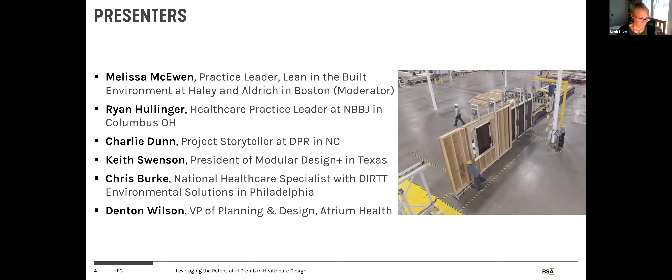There we go. Melissa, did I skip one? Melissa, we can't hear you. Thank you. It's really not good when your moderator starts the conversation on mute. So thank you, Leigh.

I'm going to be very brief because these panelists have incredible stories to share, but we all agreed that having a little bit of vocabulary at the beginning might help. There are so many terms and it's easy to get lost in the language. So just a little bit of level setting is what I'm here for. Many of these may be terms you all know, so we'll get through this really quickly. So next slide, please, Leigh.

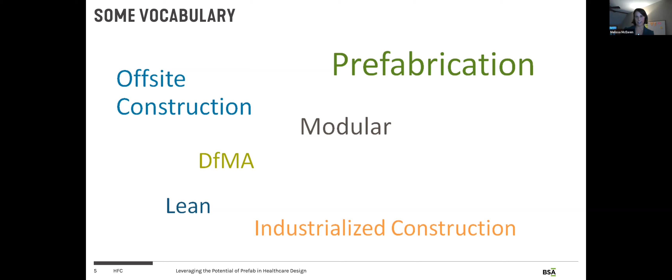There does appear there's a significant lag. There is, it's big. That's all right. So

There's sort of a spectrum of prefabrication that you'll hear about today. We'll talk a little bit and you'll hear about some single trade assemblies. This is happening a lot already. It is happening on your projects, whether you're aware it is or not in most cases. Electrical, sheet metal, plumbing, these trades have been doing this for years and are seeking to do more.

So this is electrical webs, in-wall rough, lighting assemblies, duct assemblies. This is happening off-site in people's prefabrication facilities, and it is sometimes happening on-site or in temporary spaces near sites where we're getting greater quality control, better flow. This photo happens to be a plumbing assembly from BNI, a mechanical contractor in Florida.

So next along the spectrum is multi-trade assemblies. It is just as it sounds. Elements and components from multiple trades are present. I think the MEP industry is doing amazing work here already. So multi-trade can be volumetric. So it can be box-like, think bathroom pods. It's just that it's not structural in that case.

Multi-trade can be panelized, which you will hear about today. I'm pretty sure this is a photo I took at Benson Wood up in New Hampshire. And multi-trade are things like risers, racks, skids. The photo on the right is a racking system from BNI.

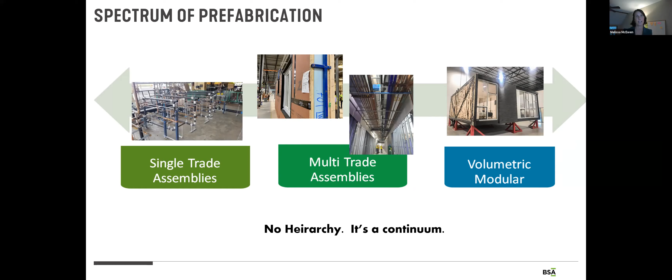So this last term that's out there, I think is a little bit more all-encompassing, and I think the lean evangelist in me really likes this term. I believe this was coined by Amy Marks. If not, she's made it heavily popular in the past year at Autodesk. So most simply, industrialized construction is about bringing the mindset and techniques of manufacturing to the built environment. So the fabrication continuum isn't so much the focus here.

It's the goals that matter, streamlining design, streamlining our building processes, removing waste, confusion, improving flow, and most importantly, actually finding ways to deliver the value our customers seek better, and being more satisfied in our own work. There's nothing like a brutal process to just drag you down every day.

So to really optimize this potential, there are a lot of enablers needed, and I think you'll hear so many of these in the presentations today. As we move along this shift and make this shift, there are behavioral enablers. The whole ecosystem of players need to change: owners, designers, CMs, trades, all the way through how we engage our supply chain. I think lean thinking is a critical element of enabling these behaviors. You'll hear about accountability and collaboration from Denton, trust, early decision making.

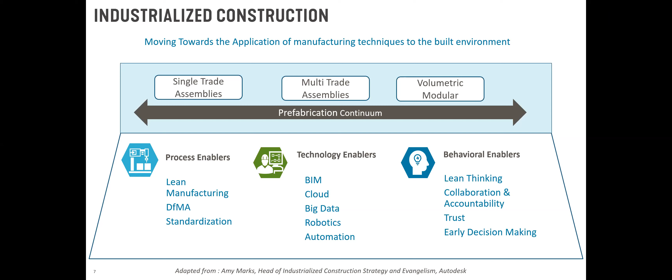There are technology enablers, so leveraging the immense and rapidly changing power of technology to make things easier and faster and better, and to allow the designers to work differently. And then process enablers. So you'll notice here I'm focusing on lean manufacturing, not so much construction. So really bringing in the concepts of flow and standardization and automation.

I've also included, and I think you'll hear today about the concept of DFMA, design for manufacture and assembly. I think the simplest way to think about this is just design for ease of manufacture of parts, ease of assembly. I prefer the term DFX, because it should be ease of anything. It could be ease of install or even ease of disassembly in our age of flexibility and reuse.

Good. So I was going to give an overview of the way we thought about prefabrication at NBBJ. And essentially, it's going to be looking forward and back. First, we start off by looking back. We're going back 12 years to the first project we did in a multi-trade prefabrication mode. That was Miami Valley Hospital.

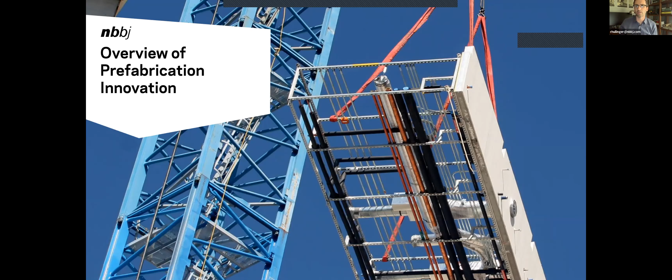Then we're going to move forward to the present. And then we're going to even think about where prefabrication is headed next, maybe 12 years in the future. I'm going to go through a lot of slides really quickly, but essentially, the big idea here is that we're not doing prefabrication for prefabrication's sake, but we just see with our healthcare clients this immense desire for standardization.

And over time, the desire for standardization across healthcare systems and all of the value that that brings in terms of operations and brand and experience, that is extreme. What we're also seeing then parallel to that in construction is a desire for prefabrication and all the value that that brings to the way the industry works.

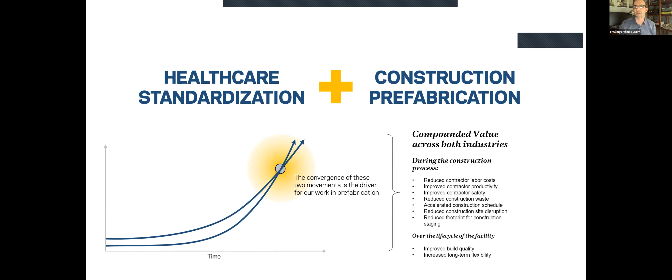So what we're doing is an overlay of those two curves, and we're looking for that sweet spot in the middle, and that's why we're interested in prefabrication, because it's the intersection of these two trends, two different industries that come together and bring value in terms of the way the building is constructed and the way it works in the future. So this started with Miami Valley Hospital.

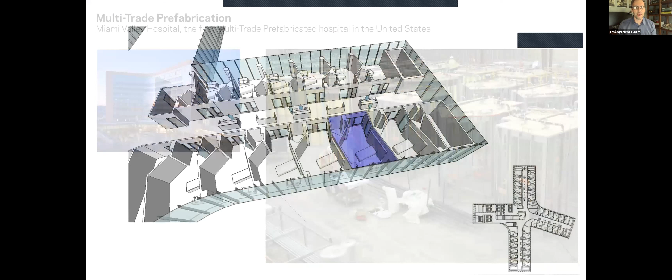Building Design and Construction called this the first multi-trade prefabricated project in the United States. Those were basically an assembly of 180 acuity adaptable rooms. And with that, we had all identical rooms spread across multiple floors and identical wings. The idea at first was to think volumetrically about it, but then the real breakthrough was a kind of hybrid between volumetric and panelized that thought of the demising wall and that componentry as something that could be repeated 180 times. So that's exactly what we did.

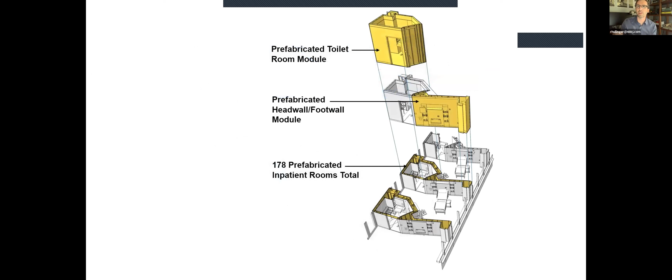We thought about building these kind of pork chop components in a factory and loading 4 of them onto a truck. In terms of the way they were going to be delivered and even picked or elevated up, we ended up splitting them into 2 pieces, the toilet room module and the head wall footwall module. But essentially that was all built in rented warehouse space, a batch plant approach with the same CM that was working on site, working off site in this case.

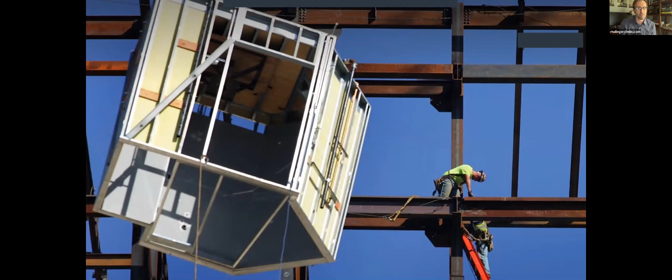And then here's a picture of these; they were pretty primitive. Again, this was 12 years ago that these were built, but the first of the toilet room modules, it was loaded up into this space. What was really important to us was the craft and quality. It didn't feel like you were walking into a prefabricated space.

And frankly, at the time, as we surveyed the landscape of providers who were doing prefabrication, we weren't seeing work that was at this level, which is why we did the batch plant approach. But that's certainly something that's changed for the better over time. And we're seeing great precision from dedicated prefabricators as well who are using an assembly line.

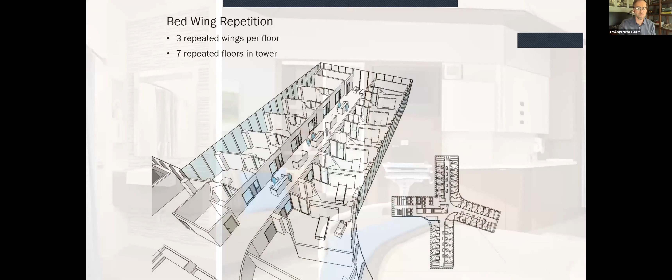Also for this project, we used the first in the country for MEP racks. So you see that arrayed across each of these wings. This was a very early BIM model back when we were using Bentley actually, but thinking about all the systems that are in between the floor and the ceiling, and then how those could be rack based.

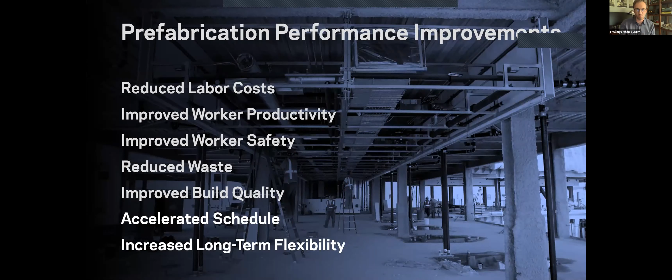In this case, it's an open core module, so it's a 16-foot wide center space that runs down the middle of each wing. That meant we could do 20 foot long by 8 foot modules for each of the racks. And those were built in the same rented warehouse space. You see all of that construction here. The metrics around that were pretty exciting in terms of the way it all came together: reduced labor cost, increased productivity, improved safety, reduced waste, build quality, much faster, and then improved long-term flexibility.

And just to touch on a few of those metrics, on a conventional job site, a plumber's installation quota is at 200 feet per day. And the plumbers in this shop were doing 600 feet per day for that 300% productivity increase.

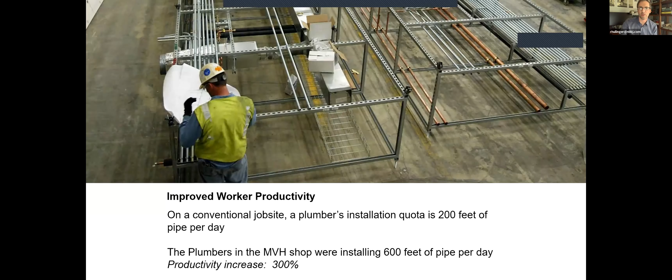Or another really important value that was brought to this was improved build quality. The inspectors were brought into that space and they could inspect all of the work 360 degrees; they weren't coming in and looking at things that were already hidden. And they really appreciated that. Plus things could be capped in the shop, which meant they were cleaner.

And then lastly, in terms of adaptability and serviceability, we designed in, and we always continue to design into these racks, a no-fly zone. And that basically gives the owner the opportunity to get up into that ceiling, access things, or even load new systems into that rack, systems that haven't been invented yet, but are going to become important in the next 10, 20, 30 years.

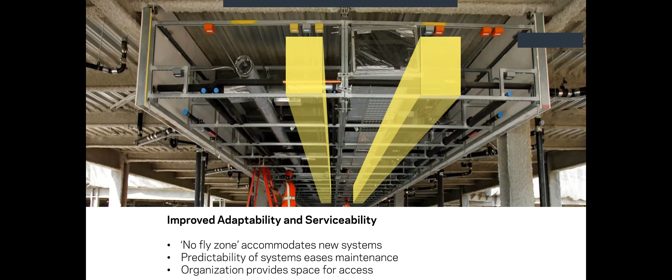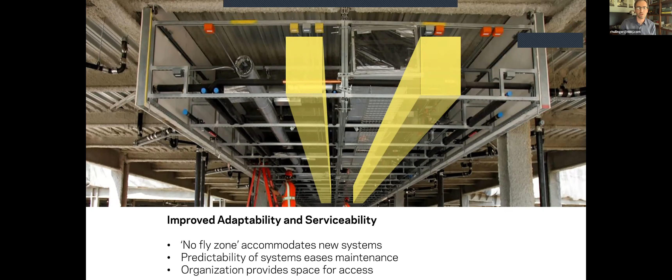So we're really seeing then prefabrication, not just as a game changer in terms of delivering the building on day one, but providing a better flexible and adaptable environment over time, and then really working against premature obsolescence. And one last story on Miami Valley, because we had adopted this prefabrication mindset, totally different direction on this, not thinking about the rooms or the racks, but even the whole construction sequence.

Unfortunately, the temporary bridge had to be quite robust, right? You were moving critical care patients through it. So it could not wobble, HVAC to the max. And it was pricing out at $2 million to stick build that. So we asked, well, now that we have a prefabrication mindset, is there a way to do that bridge in a prefabricated way? And so we had the idea of talking to a jetway manufacturer.

So we talked to the FMC jetway company. They said they would be very interested and they would provide their product. And instead of it taking 6 months to build, they could use things they already had in hand, and it could be delivered much more rapidly to the site.

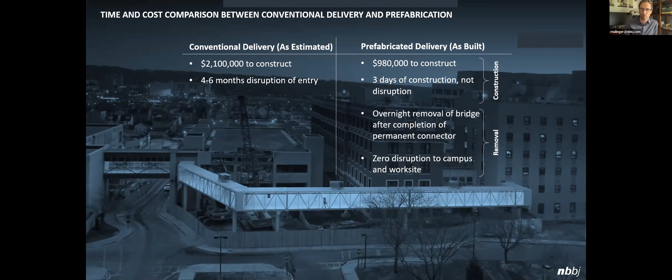And interestingly then, you compare the metrics, $2 million as estimated to construct the temporary bridge conventionally, half that cost to do it with prefabrication. It would have taken 4 to 6 months to do it conventionally. They actually installed this in 3 days, and they were able to remove it overnight when the new permanent bridge was in place because of the new construction.

Since Miami Valley in 2010, we've done a series of other projects, and you can see in this slide the way the scope has increased for each. And then one very exciting aspect of the scope increase in what we're calling Generation 3 is that we added renovation, which then minimizes disruption, because instead of shutting down a bed floor in order to do demolition and then build everything by hand inside, you can build everything before you even shut it down and really minimize the downtime for that floor.

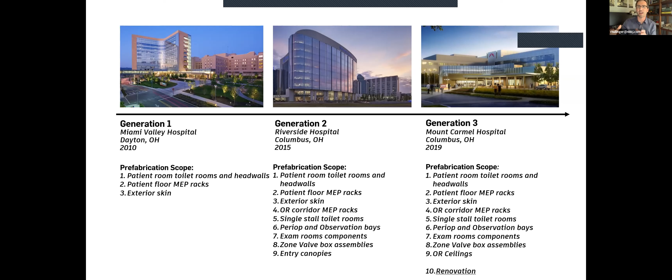The next project we wanted to talk about, really Generation 4, was Atrium. And I know that other folks down the line are going to talk more about this project, but I did want to talk about how we kind of set the table for Atrium and talked about some of the interesting advances there. And with that, we really zoomed in on the opportunity with that head wall. And thinking about the prefabricated head wall that we've been doing on multiple projects in the past, we moved forward with this idea of a smart chassis.

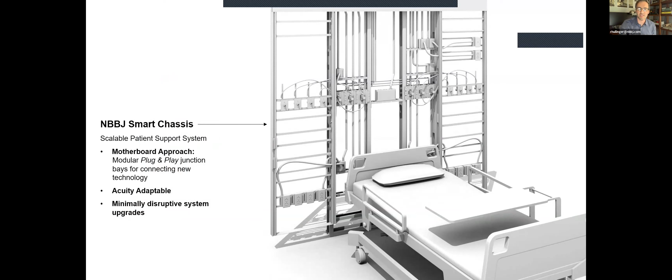And if you peel away the cladding on that head wall, then what you're getting is a motherboard approach. And so that's showing something that works well for acuity adaptability. It can accommodate systems, again, just like the overhead racks, that haven't even been invented yet. And it does it in a minimally disruptive way.

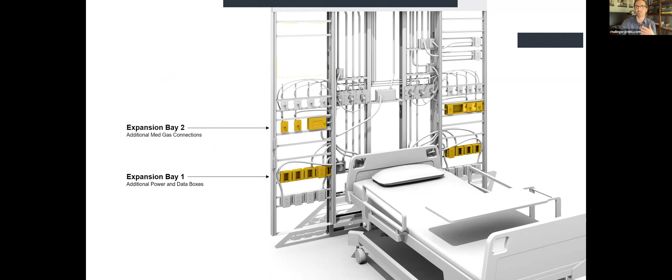So we've got a little bit of a build here that gets into like expansion bay 1 for additional power and data, expansion bay 2 for new med gases, expansion bay 3, what's down the line, an AI server, or new human interface control systems, or even expansion bay 5, which could be robotics that are built into the system. But we're thinking again about how to remove premature obsolescence and adapt for the future. And this prefabricated head wall is a great opportunity to do that.

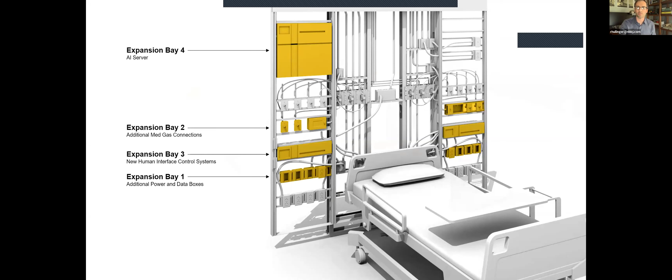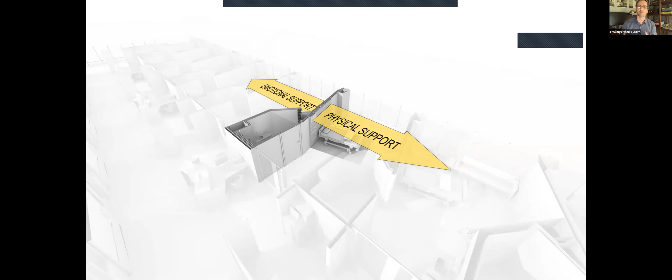And essentially then what you get are two vectors of support that come out of that chassis in the center. You have physical support, life support for the patient when it's on the headwall face, and then emotional support for the patient and family when it's on the foot wall face.

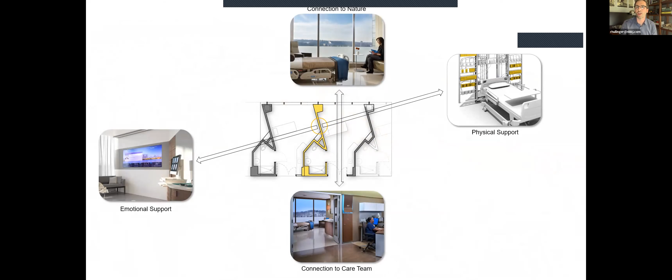Or essentially here, connection to nature up, connection to the care team down, emotional support on one side and physical support on the other, all spinning off of this prefabricated component in the center.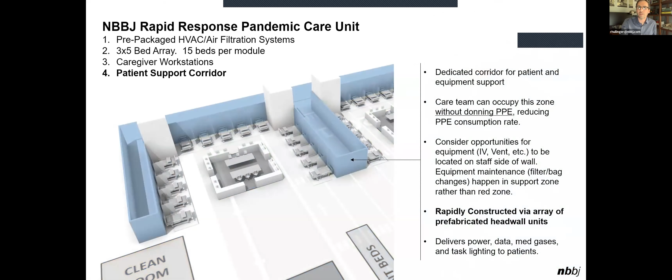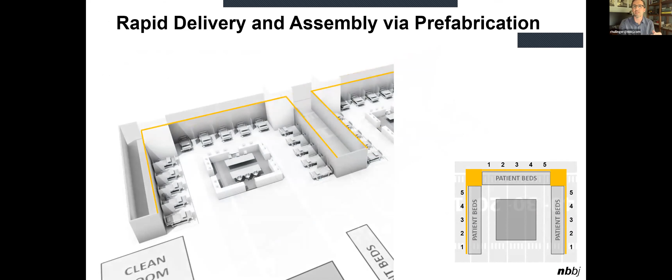We also move forward with this idea, and now this is actually thinking about the present, work that we've done for the Army Corps of Engineers. They began working with this idea of how to do surge beds on an arena field. And so we took their layout and asked, well, how could prefabrication, especially the headwall technology that we've been developing, be tied into that? And so you see here a series of units that then form the ring around the patient care space in the center.

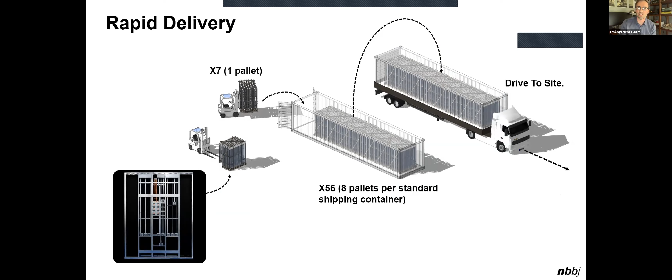It's the same company that we're working with for the prefabrication of the head walls. And again, the idea that you could put these in a truck, move them to any hotspot in the country. And when we developed this in the spring, it was definitely focused on the Northeast. Now they're beginning to do field hospital work in Wisconsin. So we'll actually see where this might go. And again, they could be reused or stockpiled, so everything can be sterilized if a pandemic materializes, and then actually be loaded into new construction once that takes place.

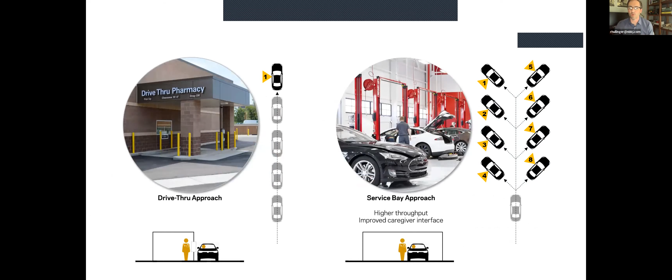And then the last thing we'll talk about is this in-car care unit. This is probably moving a few years into the future, but prefabrication also comes into play in that. And essentially we've said, with COVID, what are the next ways we can think about the safety and convenience of the car as a potential site for primary care? We thought originally about a drive-through approach, and then we've advanced that to what we're calling the service bay approach. It's parallel processing and better provider to patient interface through the car window. Here's a way that we have those.

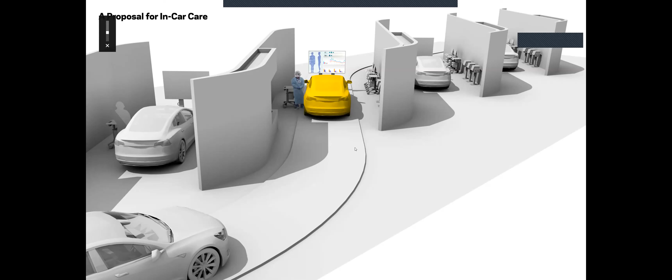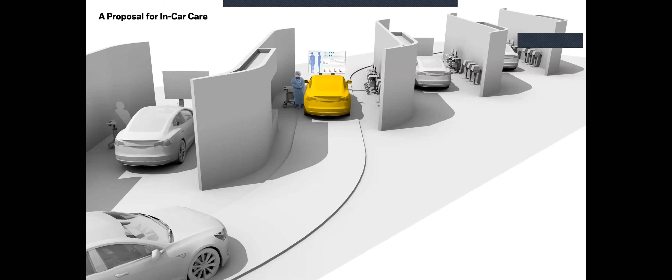Excuse me, we need one more person to mute. And now, Ryan, we've lost you. Hey guys. Okay, good, you're back. Great. Yeah, but I do hear an echo. Hello? We can hear you. Okay. Good. You guys don't hear the echo though? I hear a little echo. You do hear the echo, Ryan, yes. Maybe someone else can try muting. And I am patrolling for muting others, so if I mute you, that's why. Anyone else? Ryan, do you still have your cell phone on? Nope. Okay. Well, I can keep going. I'll just plow through the echo. Melissa, I've lost my host capacity, so I'll let you do the muting. Okay. Are you good, Ryan? You want to keep going? So we're not echoing, just Ryan's echoing. And now we don't hear him at all. And now, Ryan, we don't hear you again. Much better. You're back to normal. Beautiful. Okay, great. Not sure what the glitch was, but let's keep going.

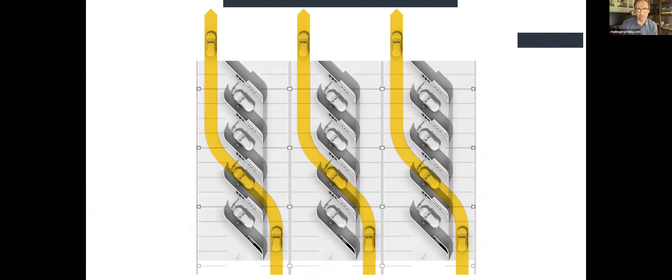Great. Okay, so I'll just wrap up by finishing this section on what car care might look like in the future, and again, the prefabrication option for that. So essentially here you see the idea of prefabricated bays, and a patient can just pull in and care is delivered right through the side of the car. And the case carts or whatever you need can then be brought to that patient. We laid this all out on a 60-foot grid, and the idea is that it works on an existing parking lot or even within an existing parking deck.

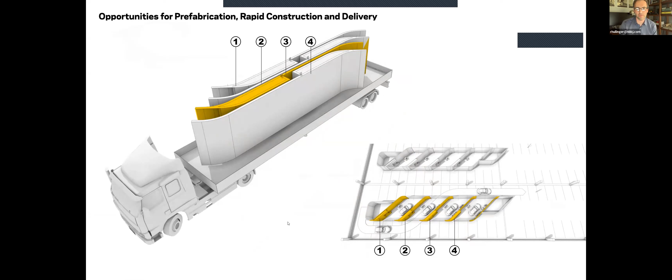And essentially then you see those blades with all of the infrastructure built in right away that are loaded on the flatbed, and then a roofing system as well for when this is done on a surface lot or the top of a garage, potentially incorporating solar too for charging of a car inside or the equipment. So then we just wrap up with a couple of images of that.

But a really quick overview then of where we've been and where we're going, and the mindset then is stitching all those things together. And we're really looking for healthcare specific opportunities and thinking, of course, about prefabrication, not just as a better way of building, but a way of making sure that the work is more enduring and adaptable for a very uncertain future in healthcare. Thank you.

Thank you, Ryan. Yes, thank you very much. If you can give control back to Lee, and Charlie, if you want to unmute yourself. Lee, have you lost the ability to share? Do I need to share? Okay. I'm good, just making sure. It's just slow. It's a big file. All right, Charlie. Okay, great.

Thanks. So a little bit about DPR. We're a technical builder. We want to be experts. We want to be builders and not brokers. And we have 5 subsidiaries that are all involved in prefabrication and modular. SurePods you'll hear a little bit about, which is volumetric. Digital building components, so true digital with robotic process automation. Robotic welding, EIG for electrical modules, OES for prefab, and equipment assist for prefab as a rental fleet. And then VueOps, where we really are working hard to understand the building lifecycle and be able to feed back both design and construction data from lifecycle data. So we stop this cycle of continuing to make the same mistakes in industries. So the next slide, please.

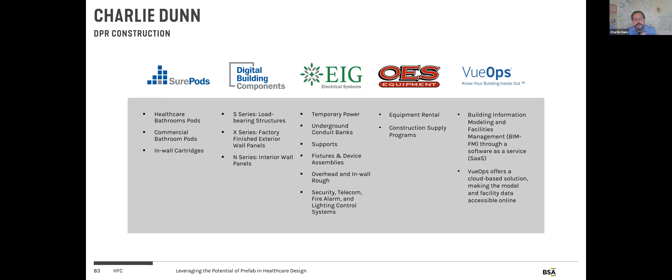I come to this guy often, and to answer the question, why would I say we want prefab as a GC, I would come to one word: productivity. And to me, and I'll get to this in a couple of these levers that I'll discuss, productivity encompasses more than just value of work in place. As we understand it better, particularly learning from manufacturing, it encompasses information flow, safety, quality, and a host of other variables. So to me, I sum up that prefab gives us an opportunity to solve this productivity dilemma we find ourselves in as an industry.

So Archimedes made this statement: give me a place to stand and I shall move the world. So we go to the next slide, and I'll couch my conversation here briefly in 3 different levers. So the first lever is this: change the presumption. As we pursued this work for Atrium, we built upon some things other teams had done, and you see this A3 and the call out at the bottom. Everything is prefabricated until it is proven otherwise. So rather than proving we should prefabricate, now we've shifted the presumption to prove that we should not prefabricate.

Go to the next slide and look at lever number 2. And this is why I think we need to change this presumption. We're still learning what is a mature model for prefab value. How do we define and measure all of these benefits? This I've borrowed from Bryden Wood. We're working on our own version of this. It involves multi-criteria decision-making, which, as we know, we struggle with as a people. And then also what we value today may not be the long-term value. We're just at the early stages of this in general construction. EPC world has been a little bit farther out ahead of us.

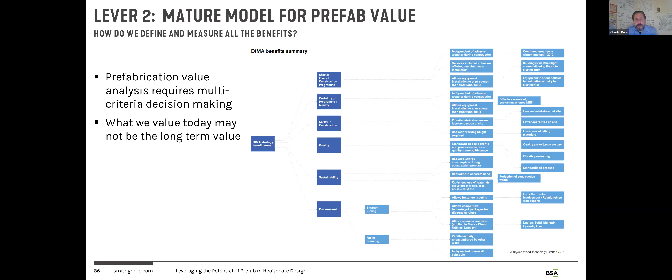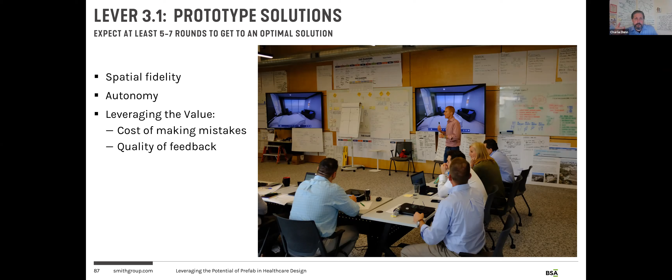So next slide. And now we get into the levers I get more tangibly excited about with this project. Lever 3.1, prototype our solutions. And understanding that prototyping will require at least 5 to 7 rounds to get an optimal solution. And here specifically, as we worked with NBBJ, I'm not going to steal Denton's thunder, as we worked in a phenomenal team building opportunity before being awarded, we learned a couple of things I wanted to share that I think would be of benefit to architects and designers. We learned the importance of spatial fidelity and the importance of autonomy on the part of the individual where you're requesting feedback.

Then we go to VR and AR. Here, there's a little bit higher cost, but not bad. And there's a little bit better quality. Spatial, I'm going to come back to. We go to functional. That's where we build it in the field. Perhaps not connected and powered, but it's functionally accurate. There, our cost goes way up. We've mobilized, we've got space, we've got materials we've built. And of course, our feedback goes up.

And then first in place, here we have the highest cost of mistakes, because often now everything's ordered. It may be fabricated, it may be on trucks, it may be in a yard waiting for us. So to go back and change is extremely expensive, and we do get better quality confirmation. But what we learned is if we can create a spatially accurate environment and overlay with the digital opportunity, either from AR using an iPad or AR using Microsoft HoloLens, now we get high quality feedback similar to the more costly options, but we've invested much less and we can prototype much faster. So taking advantage of this gap has really allowed us to drive up the value proposition for doing this prototyping.

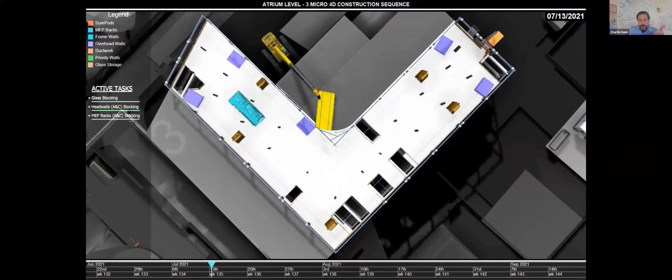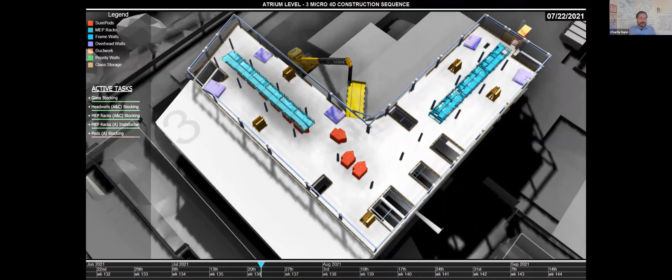Here you're observing how we first need to bring in the glass, and we're going through multiple prototypes of this, how we're going to load a typical floor. Then we have to bring in overhead walls and stacks. Then we're bringing in MEP racks. And the reason we have to do this in this sequence is we didn't have the floor space. If we brought in the pods ahead of this, we'd be blocked from doing the MEP racks. So we have to play with building this and make mistakes and realize we can't do that first, or we're not gonna be able to move this around.

And here the digital technology, one of the ways I describe this lever is to do a digital Gemba to go see the work, but we do it using a virtual time machine because the work doesn't exist yet. So we hop in our virtual time machine, we go and see the work, we understand we have mistakes in our plans, and then we create this ability to sequence this, communicate it, procure it, supply the job site, and have the most effective flow for production on the job site.

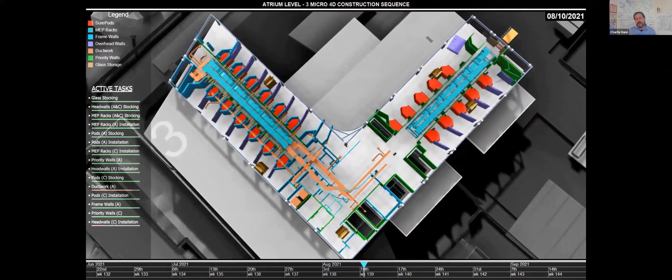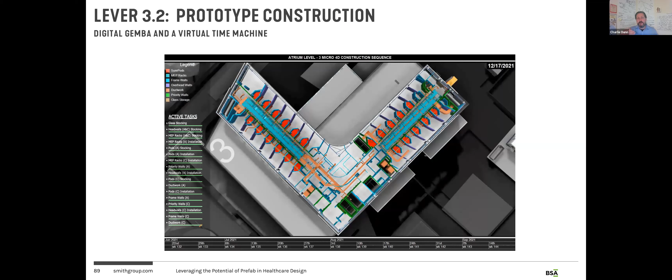And as this finishes out, I mentioned productivity being multidimensional. One that we're very excited about as we lean into it more, and we did a prefab lab in our warehouse and we began to understand this, is that now for the first time we have an opportunity to change the safety for the individual worker in construction, so that rather than bringing the worker to the work and forcing the body to adapt to the work environment, we're able to adapt the work to the worker. So eliminating the likelihood of, you can advance to the next slide, of long-term accidents.

You have to click one more time. There we go. Perfect. And these long-term accidents are very real. Shoulder, hip, back, knee. And understanding that a key part of productivity is an experienced workforce, protecting that worker over the course of their career becomes very important. And as you study the data, there's an alarmingly high rate of exits early from the construction industry due to these long-term accidents. We see prefab as being a tremendous opportunity to reduce that.

And here's just some final thoughts on using the right lever. Every time I talk about levers, I have to show this. I was on a farm in Lincoln, North Carolina. There were 8 adults, 6 children, all either in a pickup truck bed or next to a truck. A bull decided to charge at me. I didn't grow up a cowboy. I didn't grow up on a ranch. When that bull came at me and I took its horn, I understood the meaning of this phrase, take the bull by the horns. This is a lever to move a massive beast coming at you. And as technical builders, we understand hospitals can be this massive beast, with tremendous opportunity or risk for things to go wrong.

And there's one other point, now Denton, I'm setting you up, that as I went back and saw this, you see that hand in the picture to the right with a piece of bread? That's my 8-year-old daughter, Lucy. And as a parent, I say I always worked hard to keep the twinkle in her eye. Denton has his version of this that he calls CFM. I won't steal his thunder there. So as everyone else is yelling at me, Charlie, Charlie, get in the truck, my daughter, Lucy, keeps her head. She's yelling, tsui, tsui, tsui, at the bull. And as I pivot and turn, she throws that piece of bread in front of the bull's nose.

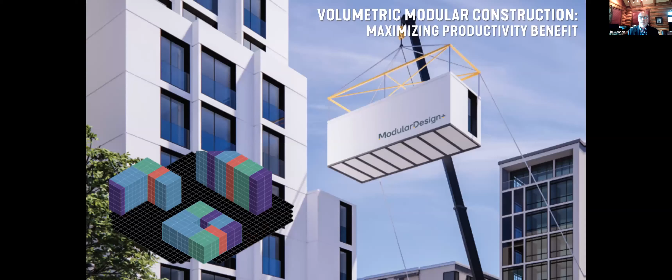So as I mentioned, we have a new facility down in Texas. This is a rendering for a hotel that we're putting in Waco. We're building the top 5 stories for that 8-story building. And these modules come fully finished inside, and they stack. They form the superstructure of the building, and you can just see some of the examples down there. But this is something that has really started to take hold of the construction market, especially in the hospitality business.

We're working on a couple projects right now in the healthcare side of things. One is stackable volumetric modular, such as these, for a recuperative care center campus in LA, and another campus for LA County that is the small format pod style. I call them small format non-structural. So you can go to the next slide.

So this is an example of what's been talked about earlier, where you take a look at everything in the building. What can you prefabricate and assemble in larger pieces, get it to site? You take the stress of the labor requirements off the site, put it in the factory where you get a lot more productivity. I get 8 hours of productivity in an 8.5-hour day. On site, I think some of the general contractors would argue that they might get 4 to 6 hours of true productivity in a traditional build site.

So you take a look at the exterior skin, how much of that can be panelized and shipped to site, the exterior walls, the interior rooms, whether you go with small format non-structural or volumetric structural stackable product. There's all kinds of considerations that have to be made. So you can go to the next slide.

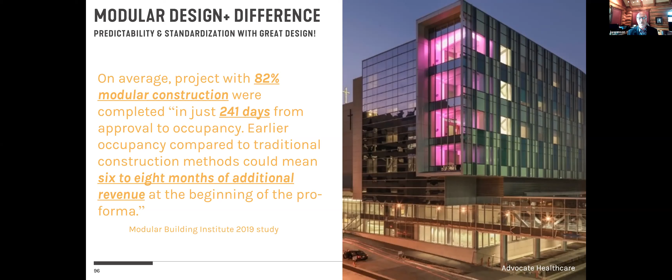So this is a study that Modular Building Institute did just last year. They did several different projects, and they came up with about the same kind of statistic. You save about 20-25% if you use over 50%. In this particular project, it was 82% prefabricated modular construction. So quite a significant compression on the schedule and early revenue delivery. Go to the next slide.

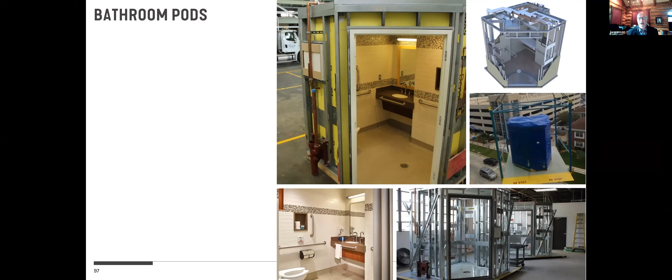So you've seen some pictures like this before. We go into virtual design, top right-hand corner. We fabricate the frames and put the shear bracing and lateral bracing, mostly for shipping. And then we finish the unit. And so you see in the lower left, that's the actual unit that was delivered to the customer's project and as it's installed. Same thing for the next slide.

This is an exam room. This is one of the Advocate exam rooms that we did. We've done over 500 of them in the last couple of years for just this one customer. And we go through virtual design and add in all of the MEP and the finishes. And if you go to the next slide.

The finished product is delivered. These rooms were actually floorless, but everything you see except the chairs and the rolling stock was on the inside of the module when it was delivered. So they finished the floor, turned the lights on, and away you go. Next slide.

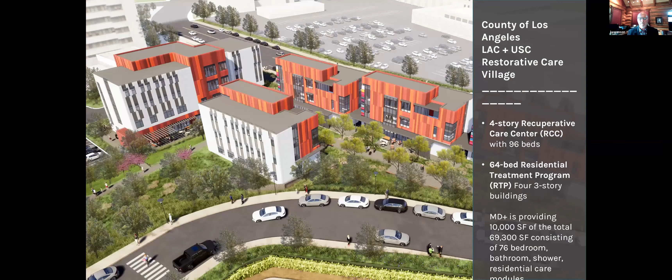Closer to the healthcare industry, we've just started fabricating about 10,000 square feet of various rooms: bedrooms, bathroom, shower, residential care modules. We're delivering 76 rooms from our Kansas City facility all the way to LA County in January, February of next year, and we just started construction on that.

But what was unique about this project is that the customer wanted modular, and they're doing 5 campuses in the LA area. One is volumetric stackable modular. It's a smaller campus. This one here is the small format non-structural cassette style or pod style. We're doing the 4 3-story buildings, roughly 10,000 square feet, and the RCC building in the back in the upper left there. We box massed that, and we couldn't find the value and the efficiencies in that because of the different room sizes and the lack of repetition and standardization.

So the customer, the general contractor and us decided to go away from that building and just focus on the RTP building. So we'll have more about that next year. Maybe I can come back, have some pictures and show you how that went. But the customer and the GC were very pro modular, and that really helps.

And it's been alluded to, if you get started early in the schematic stage of things. This wasn't drawn modular in the beginning, it was drawn about two to 3 years ago. We got it, we resized the rooms, we gave the customer what they wanted, but we found some efficiencies in standardization and repetition, and we rearranged some things.

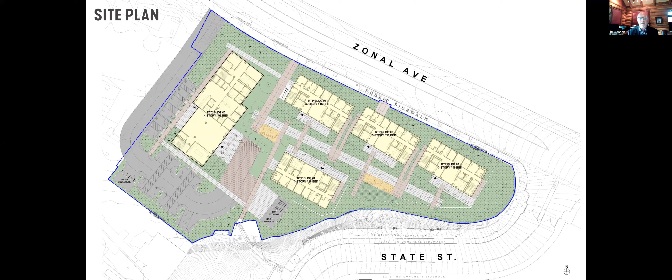So that's just the campus. We're doing the 4 RTP buildings on the right-hand side, and the RCC. So you can see it's fairly tight as well. So getting rooms into the buildings as they're built over the course of a 3-month period is challenging, to say the least. And then shipping it 1,500 miles across the country in the winter is another challenge that we're going to be faced with, but we think we're going to overcome all of that and deliver the project on time. Next slide.

So when I talk about box massing, this is how we look at the project. These rooms weren't necessarily where they are or the same size when we got this, but we rearranged it, found some consistency, found some repetition where we could, and ended up coming up with 76 rooms that we would deliver in the 4 3-story buildings that we have.

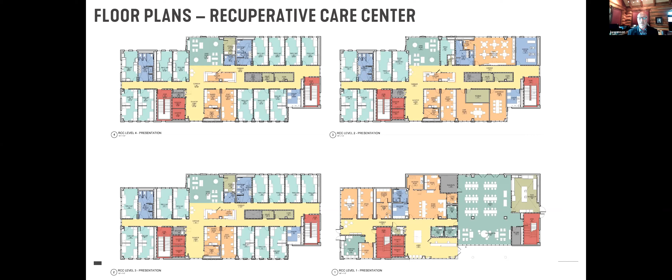Next slide. We did the same thing to the RCC, and you can see the rooms are a lot longer. Some of them are much heavier, and there weren't enough of them to change the value proposition to the customer. There wasn't enough efficiency for us to put them on the floor, and we still had some challenges in shipping, so we decided to pull the small format modular component out of that building, and they're finishing it on a traditional basis. But the customer is very happy with what they're getting, and they can say they've got modular contribution to the project. And I think the last slide.

So you can see that the customer wanted it not to be an institutional environment, just a little bit about living-centered design. These rehabilitation campuses are for people that are coming out of incarceration back into society, trying to be productive citizens and individuals. They're coming off of rehab programs. They're coming off the street for whatever reason, and they didn't want the institutional feel. They wanted more of a campus style, dormitory style, a care facility that's very open, and that's what they're getting, and that's all I have today.

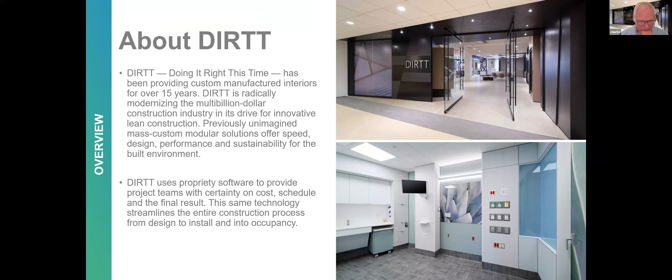So DIRTT is the leader in North America for interior multi-trade construction that's non-residential. We've specialized in healthcare for about 15 years. Sorry, something stuck in my throat. Can we go to the next slide, please? I'm sorry about that. We have 4 plants. Our plants are in Calgary, Phoenix, Savannah, and the 4th one in Charlotte is set to open up in the first quarter of next year.

And the reason that we have these 4 plants located throughout the US is so we can get our manufacturing located near where the distribution will be, and that's to create a more sustainable approach to manufacturing and also to bring redundancy into our method. So if one plant has to go down for some reason, COVID or something like that, we can easily shift the manufacturing to one of the other plants, continue to stay on schedule and meet all our requirements. Next slide, please.

So DIRTT's completed over 3,000 projects for 1,500 unique healthcare organizations. So we're really not asking people to go out on a limb and be the first anymore, right? We're not looking for early adopters. This is a proven methodology to deliver healthcare construction that meets the needs of healthcare owners. Can you move to the next slide, please?

And before I get into a case study or show you how we deliver a project, I wanted to step back a little bit and address some of the discussions that we have when we're traveling around talking to healthcare systems. And the first thing really is, what are the change drivers or challenges that they're facing? We all know that the demographics are a big challenge, right? We have an aging population, as well as a rise of millennial heads of households, and they're making decisions on how healthcare will be delivered.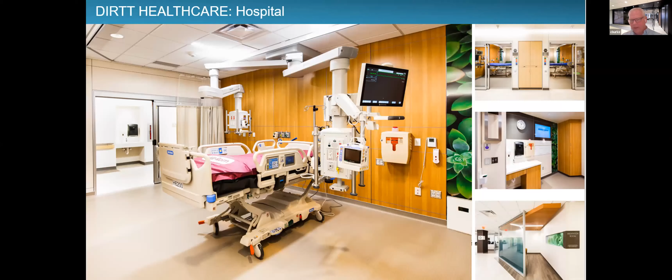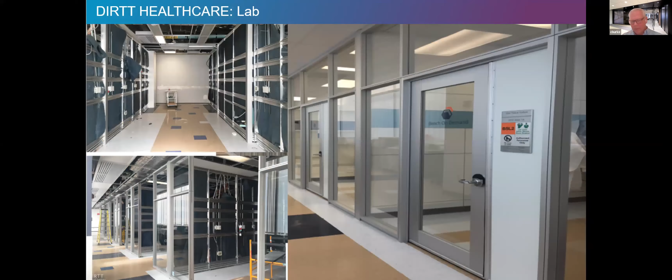So here you can see a hospital, head walls, foot walls, corridor walls, emergency departments, ambulatory surgery centers, infusion spaces, lots of different primary care pictures coming up that we're rolling through right now, simulation labs, retail health, labs, behavioral health spaces in some areas, the educational spaces attached to a hospital. We're doing a lot with testing booths right now.

And we've even moved into partnering up with contractors to create a volumetric hybrid. So the images you're seeing here, this is from a 70-bed hospital that we're building right now, almost completed, partnered up with the general contractor. So they're building the volumetric pods in their facility. We're building the DIRTT components in ours. We ship the DIRTT to the pod. They're installed inside the pod. They ship as units and are dropped into place. So we're starting to get a lot of that speed to market that you get with a volumetric pod, but preserve that flexibility, sustainability, and benefit back to the owner by having DIRTT installed inside of them.

So when you think about where you can use multi-trade construction, it's really in any type of structure, right? Whether it's a conventionally built structure or a volumetric module or something like that. So it's starting to look at how can we best integrate different types of prefab with each other to get a solution back to the owner that works. Can you go to the next slide, please?

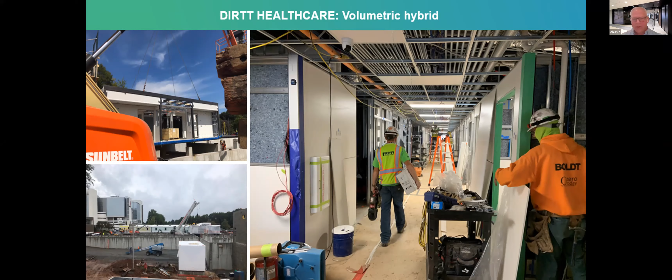And so I want to show you an example of DIRTT, and you can go to the next slide. This is a 12,000 square foot orthopedic project that you're seeing here. The key thing that Keith said earlier, one of the things I agree with him on, is that you need 50% or greater scope of work to start to make the project successful.

With DIRTT, when you're looking at the material costs, they're probably a little bit higher than a conventionally built gyp wall, drywall wall. But we make up for that by the savings across all these other trades, and the schedule savings as well. So we have to have the majority of the project using this version of prefab to be cost effective, because we're going to look at savings per trade and savings per schedule to get to overall project cost neutrality.

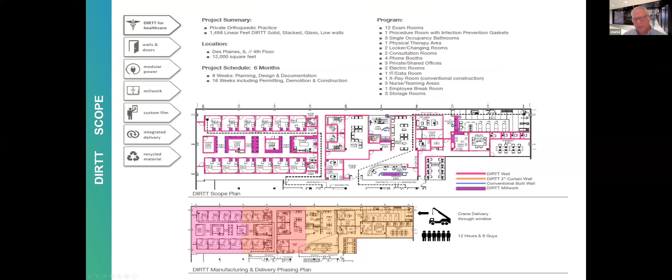So this project is 12,000 square feet. It was a 6-month schedule overall. Of that, 16 weeks were in permitting, demolition, and construction. The previous time was in the design and planning. And you can see the program in the upper right-hand corner. You can go to the next slide, please.

And when you start to look at the impact here, the key thing for any prefab project is engaging the team early, which is the case here. We were involved in preliminary design prior to moving into SD, and having an engaged owner. So if you have an engaged owner that really wants prefab used on their project, and typically that's going to involve the facilities team, the finance team, and probably the clinical team making decisions,

we can get in early. We can work with the design and engineering teams. We can work with the construction teams, talk about scope of work and how it all goes together. And that starts to drive those efficiencies. And you can see over on the right-hand side, our time on site in this whole project was about 5 weeks, right near the end of the schedule. And I'm going to walk you through that sequencing right now. If you can move ahead one slide.

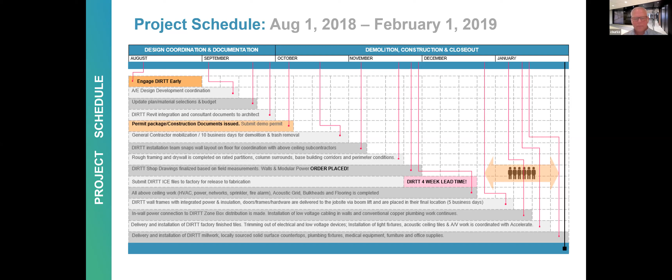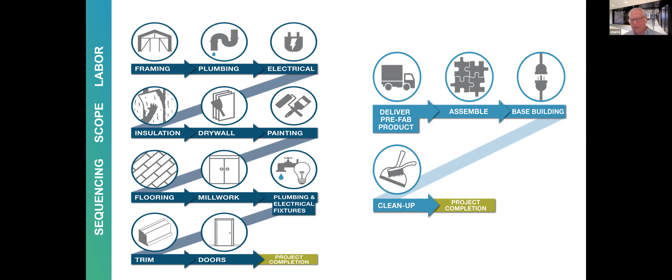Can you go to the next slide, please? And this is really the way we start to think about estimating. So if you just look at a material cost, right, DIRTT versus drywall and paint, which is typically the way we see a lot of contractors or estimators doing that comparison, it's a premium. When you start to look at the scenario I just showed you, where we look at not just what's the work that DIRTT's replacing, but what's the work that we're making more efficient in those other trades, that's when we start to get to cost neutral.

And then when we look at life cycle savings, the ability to get inside those assemblies and do your moves and changes, keep up with technology changes. I mean, every smart device that comes out has to get connected back to an IP address. You've got a leaking valve, whatever you may need to get inside and do. We've done studies with health systems, and we've been able to document significant life cycle savings based on that accessibility. It's sort of a design for disassembly approach.

And then the last savings piece is when you standardize on this and roll it out across multiple facilities, you start to see that couple percent increase that you're getting from continuous improvement. And that's by eliminating some repetitive design and using the same trade partners on a consistent basis.

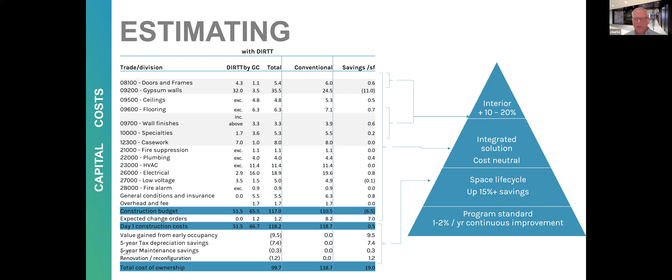Next slide, please. Chris, I'm just going to give you like the 2-minute warning. Oh, I'm at it. We have like 2 slides left.

And the last slide is coming up right now. So in summary, when you look at DIRTT, it's a proven construction method, our version of prefab. It's cost neutral back to the owner initially, and it provides that future flexibility and life cycle savings impact.

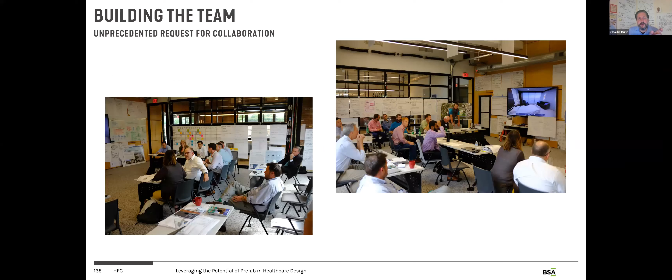We also, just a second. Yeah. I think, Lee, go ahead and advance. We've got an A3 there. So this is the RFC, but here's when Denton's speaking of the A3 work. Yeah, thank you very much.

Because if you're not using A3s, I just beg and plead of you to get into the process of using these. I'm not sure how many of the 58 people on the call use an A3, but they are the driving force behind holistic thinking. They talk about a current state and a future state, and those two questions are presented to the entire team. The entire team gets an opportunity to voice the impact upon them, which lets the entire team learn what each other does and the impact on each other.

And then it gives us a cost impact, a schedule impact. And by gosh, it gives me the number one thing that this owner wants, which is a holistic recommendation from the team on what they believe is the right thing to do. And then it gives us what is the next step. And when you're working for a hospital system that goes through project after project after project, why reinvent the wheel on each one of these?

All these are sitting in a historical norm. You go and you say, I want to understand concrete versus steel. You go look up the A3, you update it to current state, and away you go. So we went from having 900 pages of standards at Atrium, which if we understand the difference between design assist and design and told, 900 pages of standards is design told.

And we took it down to 90 pages of guidelines so we can actually engage the folks that we hire and trust them to be the thought leaders to make that a living, breathing document so each project gets better as we go. The room standard, we brought 5 architects in, 5, to come up with an Atrium standard room, multi-acuity, multi-adaptable, the room that Ryan showed you, which if we had it today, we would not be fighting the surge need that we have because we would have all the flexibility.

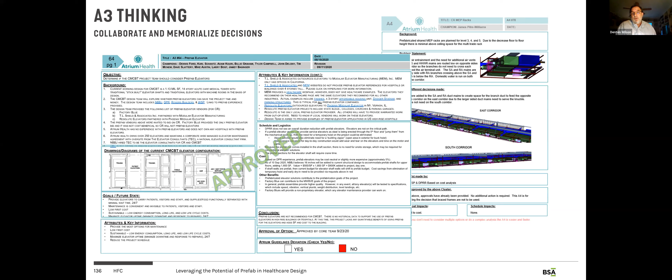I saw a question come up through the chat on what about flexibility. The flexibility that we're putting in the backbone, the infrastructure, the room types, the knuckle for our nurses stations, it's fantastically futuristic looking and how to go forward. So everything that Ryan was showing on our head wall standards, our bathroom standards, we have core team, steering team, and clinical core team, and then Atrium image team that have walked through all of our mock-ups, have totally approved everything. The decisions are made for the next 6 years of progression of 700 patient rooms.

And the only thing we've all committed to is this is the baseline. We're going to continue to make it better. That brick wall on the right-hand side, that is a prefab wall element sitting down in Atlanta right now for every one of that 8-story building to come up with those modules as you see it there on Z-clips and put it on the face of the wall. So the sky is the limit.

It is a phenomenal, fun, innovative, passionate teams that are working in big room environments that everybody has a voice, the walls of accountability that talk about the critical path, the difference it's going to make, and when decisions have to be made, people know why. So prefabrication is driving the accountability and the innovation that as an owner, we're just starving for. So I couldn't be prouder of what the team's doing.

Charlie, what do you do on the next slide for them? We'll see what it is. The next one takes them to their warehouse. So this is where. Yeah.

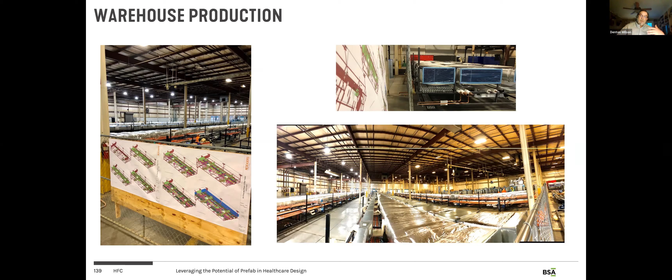We also learned a lot about how to engage our users to feel like they really have the impact of decision making. So MBBJ has really been a thought leader on how we do fish bones and A3s, and we engage all the folks. And what that has done in the innovation of trying to engage holistic thinking, we've now brought our clinicians in much earlier in the process to think about what they need based on their current environment. And now what we're finding is they're changing their current environment to be better prepared. So when they move to their new environment, they're already ready to use it, which is just an incredible win all by itself. So unbelievable maturity of where it's going.

There's my, collaboration equals accountability, accountability equals measures of accountability. Prefabrication is 100% about accountability. Hit your marks, hit your critical path, share with your users the matrix of decision making, be upfront with what they can and can't change.

Because if you're going to do prefabrication and you have a chief nursing officer come in when the walls are going up and she wants to make changes, no, we don't allow it. We've been very transparent and upfront about it, and it's been fantastic. What's next on the slide? Just that video showing the current plan to bring the building up.

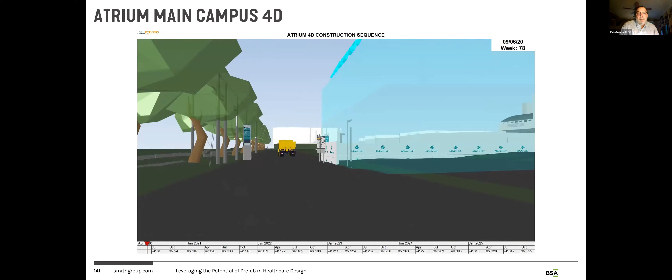Yeah, so honest to goodness, we are flying an airplane and changing the wings as we do it right now. Denton has come in and spun the head off a whole bunch of people. I have no desire to make a project better. I really want to make this industry better and this region better. And it's amazing to watch how excited these teams get when you actually give them the environment, the tools, the mindset, the support, right, from an owner standpoint, to say, anything you want to bring to the table, let's talk about it. Let's find a better way to make the process better.

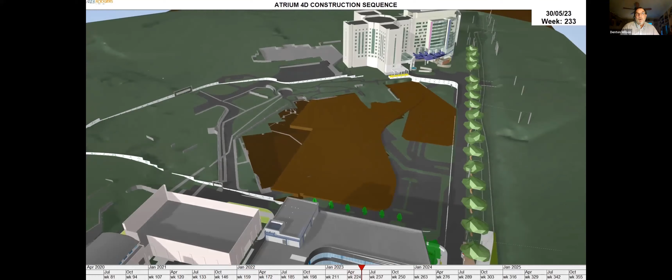I will share with you very holistically that silos have always been the piece that people say are the badness. We've always been in silos in our traditional thinking. From an architectural standpoint, I want you to have silos. I want you to have time to really do fantastic design, to really think through it and have that time to do your job. But I want you to be able to take everything you learned and transfer it over to folks that now really care about what you want to protect and what's important to you. And that has been the real win in building teams.

I left the owner side after 28 years and went to the dark side and went to work for Beck because I wanted to help them figure out how to really do collaborative integrated projects. And so I came up with a 14-step process that shows the structure of collaboration that one must have to create the environment that allows teams to engage holistically together to get the goodness that the owners are looking for. And that's based on creating real alignment, real expectation sessions, creating real measures, taking retrospective pauses, and making sure we're learning through the journey. And the teams that know how to do that, boy, it's the opposite. You have to pull them back so they don't burn themselves out, and that's just a blessing.

So we are working hard. That is a beautiful billion-dollar project right in front of you with a brand new CR to the left of it, which is another 100,000, and it's going to be all prefabbed. Boy, 60% of it. It's incredible. So I'm very proud of what everybody on this team is doing. That's the main point of what I want to tell everybody today, because this team is rocking it. They're doing a great job, and the sky's the limit for what we're going to do next.

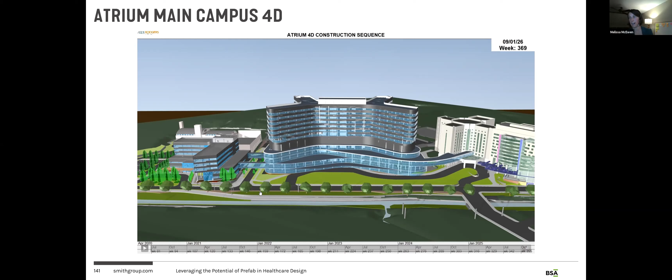Excellent. Thank you, Denton. I think you have an audience of people who wished you were the owner they were working for after that. So Lee, how do you feel about the plan to do a bio break? I really want to make sure that we give adequate time to the Q&A, but I am also sensitive that we have all been here for an hour and a half already. Yeah. 5 minutes? 2 minutes. 2 minutes. Okay. Maximum 5. Yeah. Yep. So folks need to stretch, take a quick break.